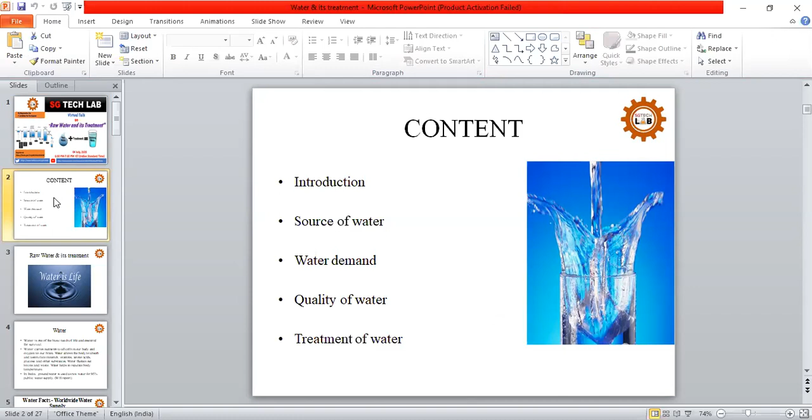First of all, we are talking about water. The basic thing we say about water is that water is life, because water is one of the basic needs of life and essential for survival. Water carries nutrients to all cells in our body and to our brain. Water allows the body to absorb and assimilate minerals, vitamins, amino acids, glucose, and other substances. Water flushes out toxins and waste, and it helps regulate body temperature. So the entire process carried out in our body has water playing the main role.

In India, groundwater is used as raw water for 85% of public water supply. Here are some facts: water covers 71% of the Earth's surface, and there are 326 million cubic miles of water on the planet. 97% of the water is found in oceans, which is too salty for drinking, growing crops, and most industrial uses except cooling. Almost 320 million cubic miles of water is in the oceans.

3% of the Earth's water is fresh, and 2.5% of fresh water is unavailable - locked up in glaciers, polar ice caps, atmosphere, and soils, or lies too far under the Earth's surface to be extracted at an affordable cost. Only 0.5% of the Earth's water is available as fresh water.

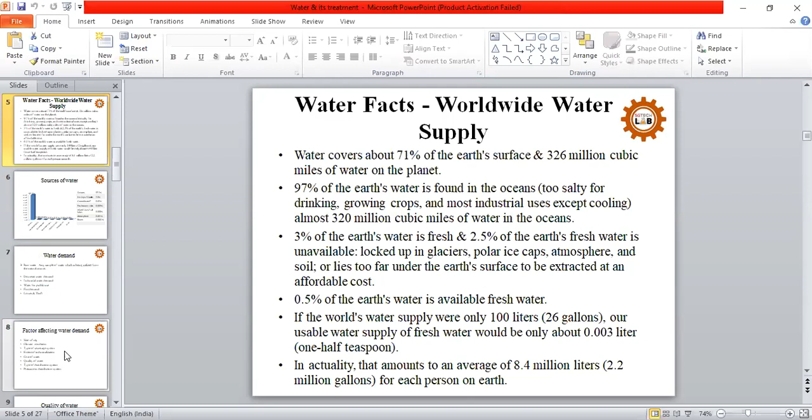Now we are going to talk about the factors that affect our water demand. First of all, the size of the city, because size of city is directly proportional to water demand. If a city has a large population, then obviously there is large demand, and if a city has a small population, then obviously there is low demand.

So if we are talking about the demand - here are some slides. Obviously we have sources of water. First, we are talking about the source of water. In the ocean, there is 97.2% of the water on our planet. Then ice caps, 2% of water in ice caps, which is locked.

Then groundwater, which is 0.62%, fresh water lakes 0.009%, inland seas or salt lakes 0.008%, atmosphere 0.001%, and rivers 0.0001%. This is the source of water which varies from one part to another, showing the overall variation of water clearly here.

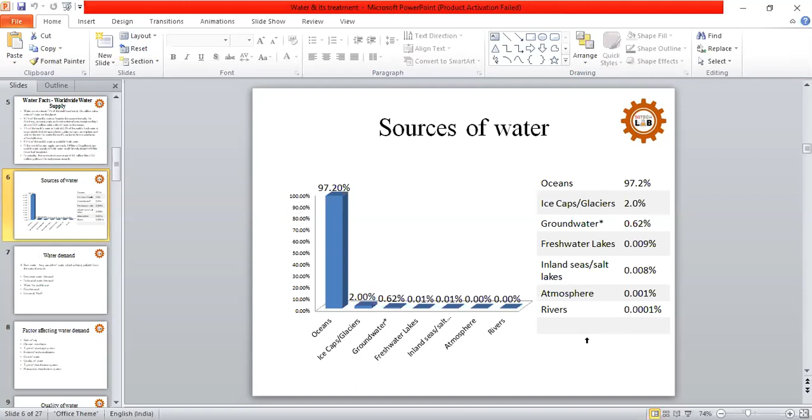And now the water demand. First, we are talking about raw water. Raw water is any sample of water being utilized from a natural source, such as lakes, rivers, ponds, or wells, and it is not being subjected to any artificial treatment.

Here are some types of demand, such as domestic water demand, industrial water demand, water for public use, fire demand, losses, and theft. First we talk about domestic water demand - it is the amount of water required to satisfy domestic needs, like drinking, cooking, washing, bathing, etc.

For a city having full flushing system, water demand is in the range of 135 to 225 LPCD, that means liter per capita per day.

If we talk about industrial water demand, it is the amount of water required to satisfy industrial needs. Depending upon the extent of industrialization, it is in the range of 50 to 450 liter per capita per day.

Another one, institutional water demand, is the amount of water required to satisfy the needs of different types of institutions in our community, like schools, hospitals, railway stations, airports, etc. It is in the range of 20 to 50 LPCD.

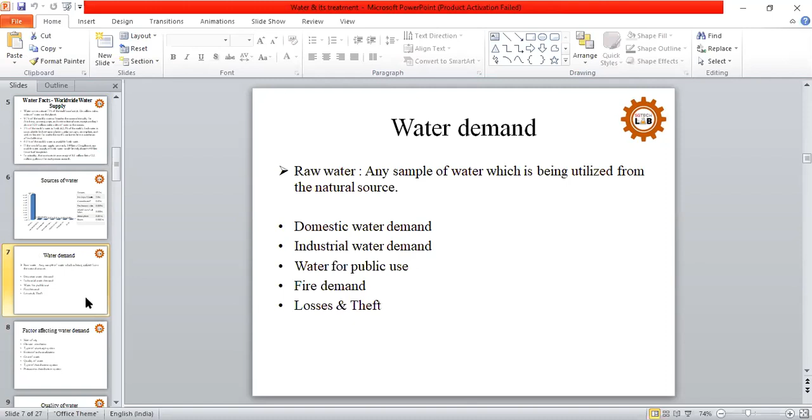So our next slide is about factors affecting demand. The first one is size of city, climatic condition, type of sewerage system, extent of industrialization, cost of water, quality of water, type of distribution system, and pressure in distribution. These all things affect our water demand.

I think most of them are directly proportional to demand. The size of city is directly proportional to water demand, because if the city has a large population, that directly affects the demand. If it's a large population, the demand will be high; if a small city, the demand will be low.

Climatic condition: if the climate is hotter, demand will be high. Type of sewerage system: if there is a proper facility of sewerage system, demand will be high, because you have a proper facility. Extent of industrialization: how much industry is in the city — if there's a large industry presence, demand will be high in that area.

Cost of water: have you put a cost on water? If you put cost on water, demand will be low. If there is no cost for water, demand will be high. Quality of water: if you put good quality of water, demand will be high; if the water quality is poor, demand will be low.

Type of distribution system: how much pipe have you distributed in that area? If the number of distribution pipes available and a proper distribution facility are available, it also affects demand, which is directly proportional to it. And the last is pressure — it's also directly proportional, because if the pressure is high, then uses of water will be high, or losses of water will be high. Almost all of these, except the cost of water, are directly proportional to water demand.

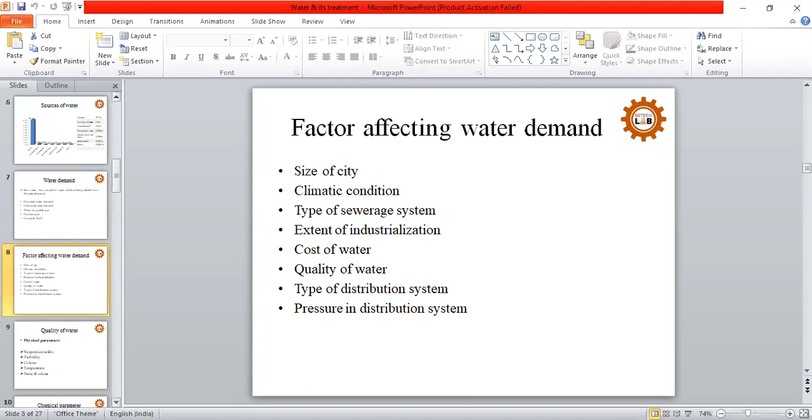So our next slide is about quality of water. We are talking about the quality of water, but here are three forms to check the quality of water: first is physical parameter, second is chemical parameter, and third is biological parameter. If we talk about physical parameters, there are various things we are going to discuss.

First one is suspended solids, second one is turbidity, third is color, fourth is temperature, and the last is taste and odor. So if we talk about suspended solids — the quality of water is found with the help of certain indicators and parameters known as water quality parameters.

All water quality parameters are classified as physical, chemical, or biological. In physical parameters, we start with suspended solids. Suspended solids may come from organic matter such as algae and plankton, or from inorganic matter such as sand, silt, clay, etc.

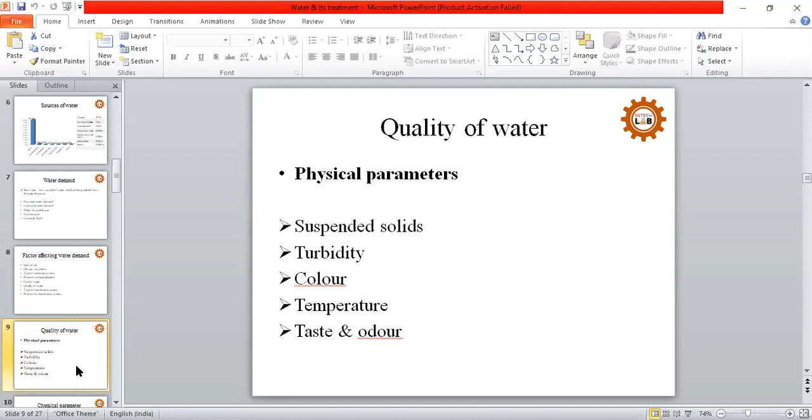It is measured by the device osmoscope, and the limit is one odor number, and the cause for rejection is 3 TON. So the next slide is going for chemical parameters.

In chemical parameters, we first talk about dissolved solids. Dissolved solids in water can also be approximately determined by measuring the electrical conductivity of water. It is almost electrical conductivity into 0.65, giving the total in milligrams per liter.

Second one is alkalinity. It is the ability of water to neutralize acid, or may be defined as the concentration in water which is capable of neutralizing hydrogen ions.

So the major causes of alkalinity are OH minus, known as caustic alkalinity; HCO3 minus, bicarbonate alkalinity; and CO3 2 minus, carbonate alkalinity. Minor sources include HS minus, ammonia, H2PO4 minus, HPO4 2 minus, and so on.

The sources of alkalinity in water are induced by inorganic minerals, salts, organic matter, and dissolved gases like carbon dioxide, ammonia, or hydrogen sulfide.

Next was about pH. pH is generally measured by an artificial scale in the range of 0 to 14, which is used to indicate the acidity or basicity of water.

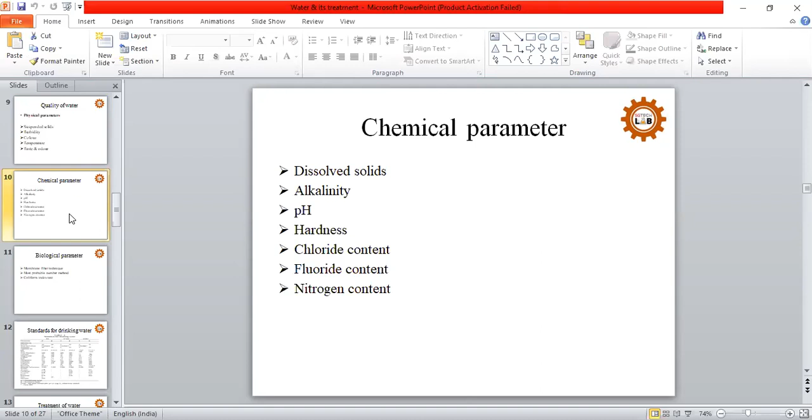This is all for the chemical parameters. Now we are talking about the biological parameters. In biological parameters, the first one is membrane filter technique, second one is most probable number method, and third one is coliform index test.

In most probable number method, it is the multiple tube fermentation test in which water samples of different dilution ratios are mixed with lactose food, that is, food for coliforms, and it is incubated for 48 hours. There are three samples, 10 ml, 1 ml, and 0.1 ml, tested for the presence of coliform by testing for the presence of acid and gas in these samples. The result of the coliform obtained is further correlated with the dose of pathogens present in the water.

The last is the coliform index test. In real terms, it is not a matter of testing coliform in water. It is used to represent the coliform in terms of a parameter called coliform index, which is defined as the reciprocal of the smallest quantity of the sample that shows the presence of coliform in it.

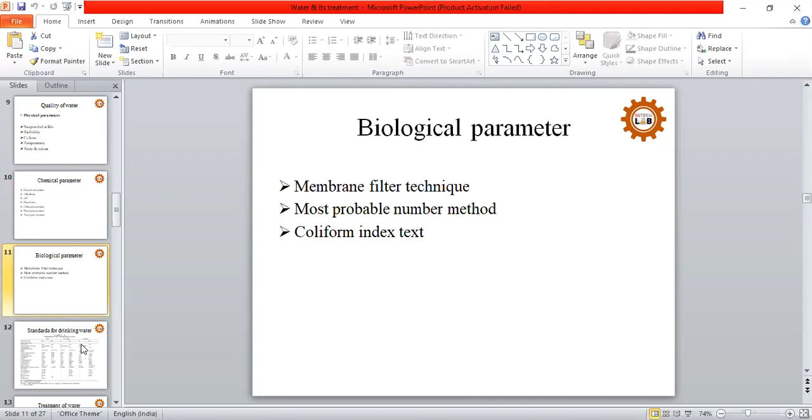This is our biological water quality parameter, and here are the standards for drinking water, the permissible limits for any of these parameters. We can clearly say that there are three standards: first is ISI, the Indian Standards Institute, second one is ICMR, and third is WHO. They give the total permissible limit and the excessive limit.

If we talk about color, it ranges from 10 to 50 across these standards, but ICMR's limit is about 5. India also has other standards, just like ICMR, such as the Bureau of Indian Standards. According to the Bureau of Indian Standards, there's a specific code, IS 10500, published in 2002. Overall, these came into effect with the objective to assess the quality of water resources and to check the effectiveness of water treatment and supply by the concerned authority. So we should always keep in mind that our drinking water does not cross these permissible limits.

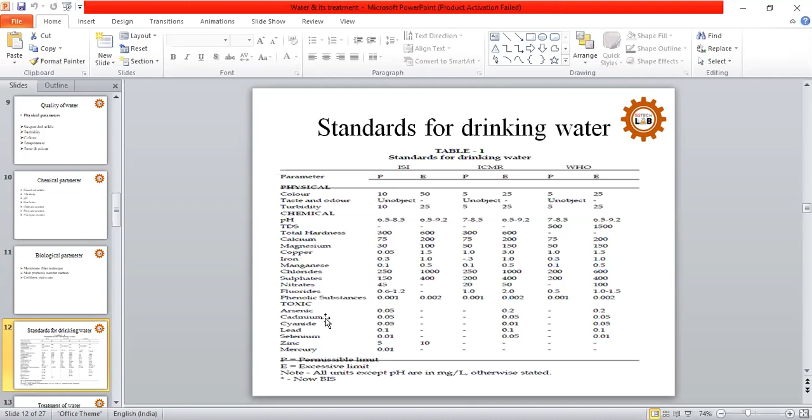So now here we are talking about the treatment of water. Treatment of water is done with screening, aeration, coagulation, flocculation, sedimentation, filtration, disinfection, and last is softening.

First we talk about screening, the process of removal of heavy solids from water like plants, trees, animals, stones, etc. Screening is done generally for the treatment of surface water because groundwater does not contain large particles. It is done with the help of units termed as screens, which are broadly classified into two parts: coarse screens and fine screens.

Coarse screens are in the form of bars of diameter 10 to 25 mm, having a spacing of 20 to 100 mm center to center between them. These screens are always placed at an inclination of 3 to 6 vertical to 1 horizontal, as it helps in effective cleaning of the screens by raking mechanism, where head loss occurs. So we try to put the screens at an inclination.

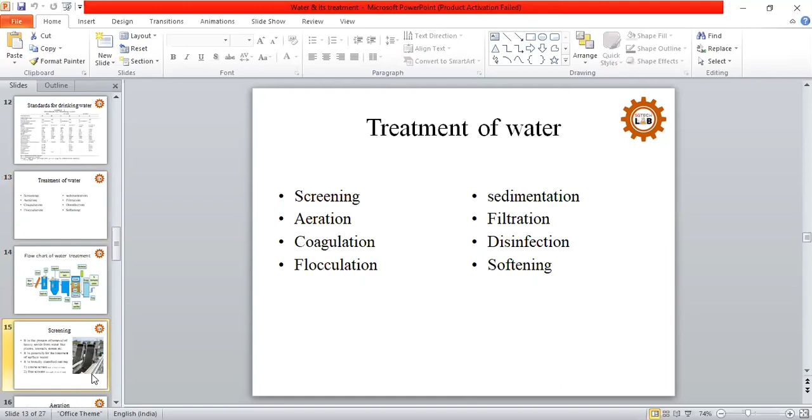Coagulation is the process in which certain chemicals termed as coagulants are added in water so as to neutralize the negative protective charges present over the suspended particles and to form a sticky precipitate which attracts fine suspended particles over its surface, leading to formation of a bigger size particle which can get easily settled in the following sedimentation process. In order to neutralize the charge over the suspended particles, a certain minimum energy termed as threshold energy is required to be provided, which is induced by fast mixing in this process.

There are different chemicals used as a coagulant, such as alum, that means Al2(SO4)3 and 18H2O. This is hydrated aluminum sulfate, which when added with water reacts with the alkalinity present in it, and leads to the formation of a sticky gelatinous precipitate of aluminum hydroxide, which attracts fine suspended particles over its surface, leading to their settling in the following sedimentation process. If alkalinity is not present naturally, it is induced artificially either by the use of lime or soda ash.

So another one is copperas.

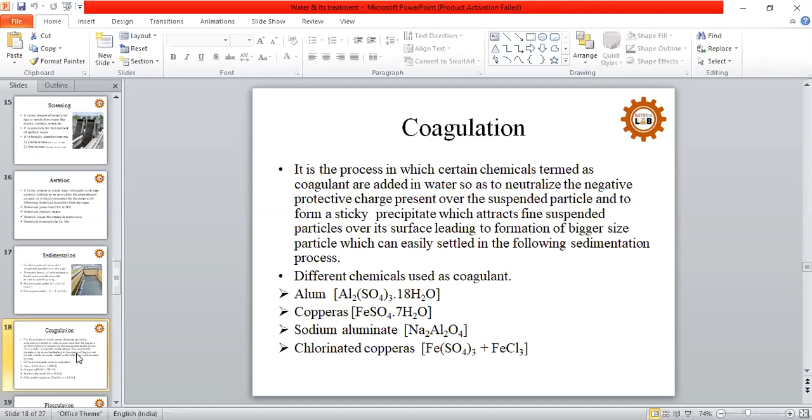So after coagulation, we are talking about flocculation. It is the process in which neutralized particles are brought into intimate contact with each other and with a sticky precipitate, resulting in the formation of bigger size particles which can get easily settled in the following sedimentation process. In order to increase the tendency of combining, slow mixing is also induced in this process.

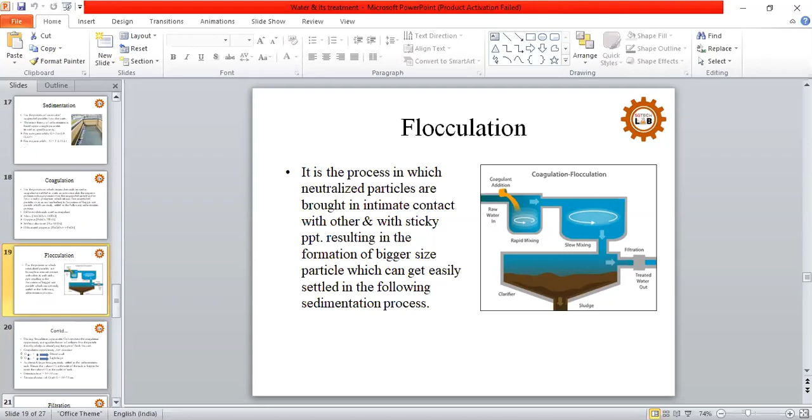During flocculation, a parameter G into T represents the coagulation opportunity. It signifies the number of collisions between the particles, thereby helping in identifying the type of floc formed.

Coagulation opportunity GT is always constant. If G is increasing and T is decreasing, then the floc formed is dense and small. If G is decreasing and T is increasing, then there will be a light and large floc.

As dense and large floc forms easily settle in sedimentation tanks, the value of G at the inlet of the tank is kept to be twice the value of G at the outlet of the tank. Generally, the detention time will be 10 to 30 minutes, and the temporal mean velocity gradient is equal to 10 to 75 per second.

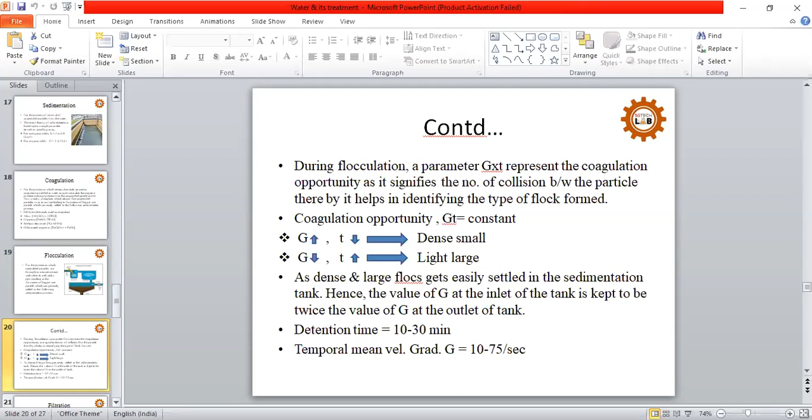Now we are talking about filtration. It is the process of removal of fine suspended particles and floc that could not be removed in sedimentation. Filtration, apart from the removal of suspended particles, also removes organic matter, microorganisms, and dissolved solids from the water.

Generally, there are two ways for filtration. First one is gravity filters, where we have two options: slow sand filter and rapid sand filter. In these, the head required by the water to overcome resistance is obtained from the water's own height or weight above the medium surface. The second one is pressure filter, where energy is required, and the treatment is carried out in a closed container.

Another example of a pressure filter is the reverse osmosis process. RO filter is used based on the principle of pressure filters. So now we are talking about reverse osmosis.

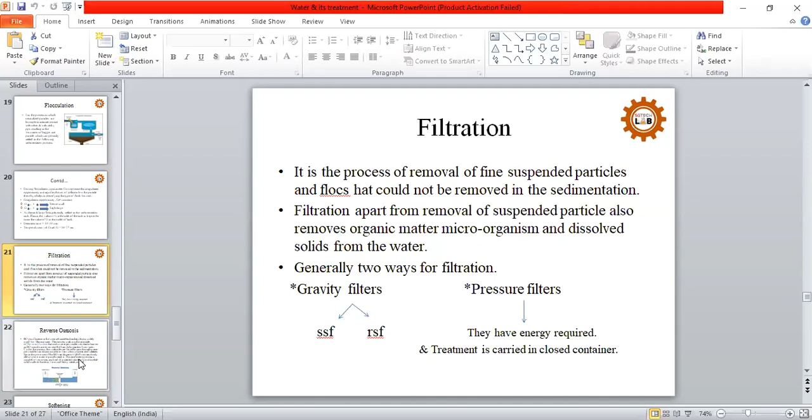RO purification is the most advanced technology for this process. Under the process, the molecules are forced to pass through a semi-permeable membrane in order to get a less concentrated solution. Since the pore size is 0.005 microns, the purification process is capable of removing any kind of impurities, starting from dissolved solids and salts to bacteria, virus, and heavy metals.

Filtration can improve the odor, appearance, and taste of your water. However, the major disadvantage of the RO system is that it removes most of the minerals from the water.

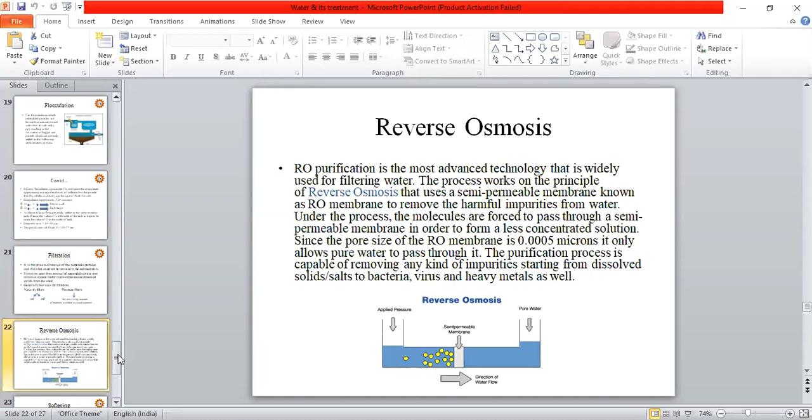So this is our RO process. Now we are talking about softening of water.

Softening is the process of removal of hardness from the water. It can be done generally by two methods: the lime soda process and the zeolite method. And the last one is demineralization.

The lime soda process removes all the carbonate hardness present in the water, where lime converts magnesium non-carbonate hardness into calcium non-carbonate hardness, Ca2+, and lime also reacts with carbon dioxide to get wasted out as calcium carbonate.

Where carbonation, recarbonation, these all parts will occur. So we are talking about the zeolite method. It is a natural or synthetic cation or base exchange hydrated silicate of aluminum and sodium.

The equipment used in this case is same as the pressure filter. When hard water is passed through the zeolite bed, it exchanges its univalent sodium ion with the multivalent cation causing hardness in the water. But zeolite itself gets exhausted, which is further regenerated by passing 5 to 10% solution.

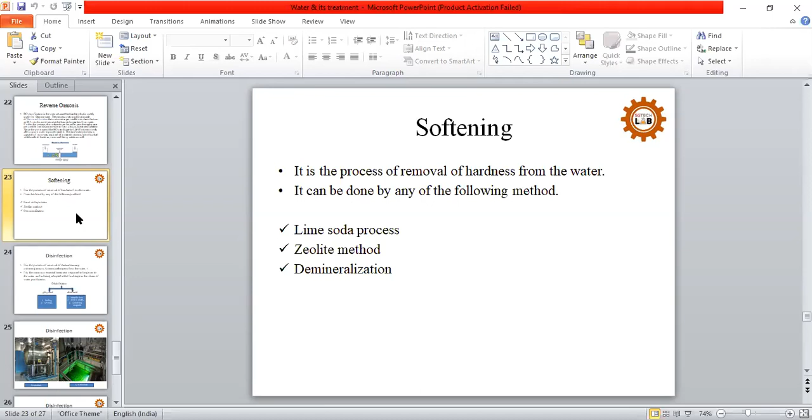So now we are talking about disinfection. It is the process of removal of disease-causing microorganisms, that is pathogens, from the water. The process of removal of all types of microorganisms from the water is termed sterilization. It is the minimum essential treatment required to be given to water, and is adopted at the final stage in the chain of water purification.

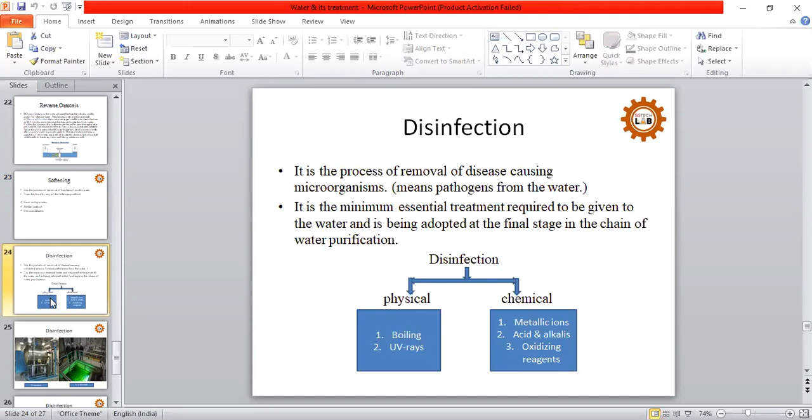During war time, we directly take raw water or surface water and disinfect it for use, so it is the minimum essential treatment for water. In the disinfection process, we can see the ozonation process and UV filtration process, which are done in our industrial systems.

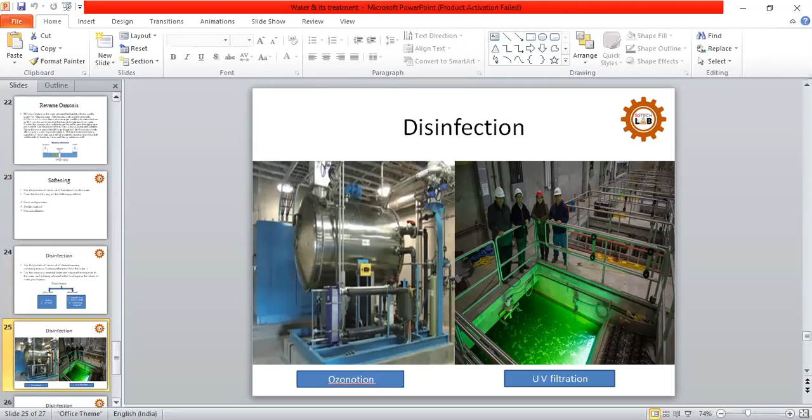So what is the disinfection process? The minor method of disinfection is treatment with ozone. O3, when added to water, dissociates into oxygen and nascent oxygen, which carries out the removal of microorganisms and oxidation of organic matter.

Nascent oxygen, being highly reactive, strikes the cell walls of microorganisms, thereby leading to their destruction and finally killing of the microorganism. However, nascent oxygen, being highly reactive, is not capable of safeguarding the water against future recontamination.

Ozone also gives a pleasant taste to water when used as a disinfectant, but it is comparatively costlier than other methods.

Treatment with potassium permanganate: KMnO4 is a very popular disinfectant used for treating well water supply and contaminated systems on a lesser scale. We also hear it referred to as 'lal dawa', which was generally used in our well systems 10 to 20 years ago.

KMnO4 gives a pink color to the water, which disappearing indicates the presence of organic matter and microorganisms in the water. Hence, it is added to water up to the extent that the pink color remains, indicating removal of organic matter and microorganisms from the water.

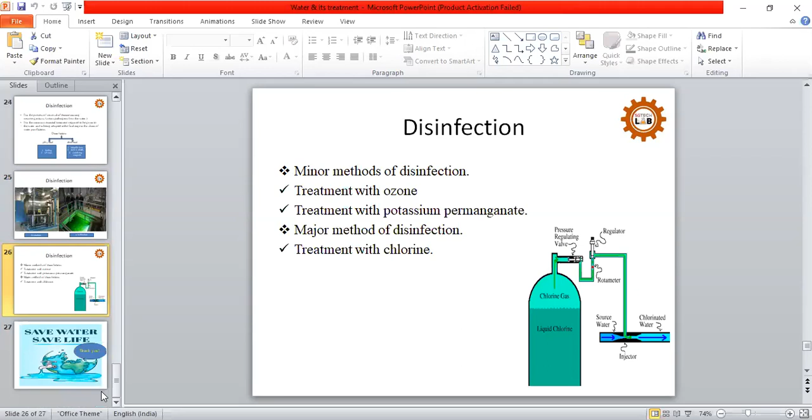Water is a boon for us, granted by God, Ishwar, Allah. So we should use water properly. In some areas where the shortage of water occurs, they know its value. So water is precious for us, and I request all of you to save water and save life.